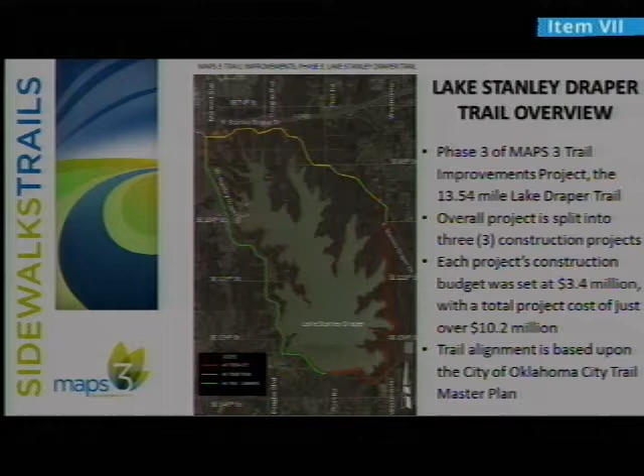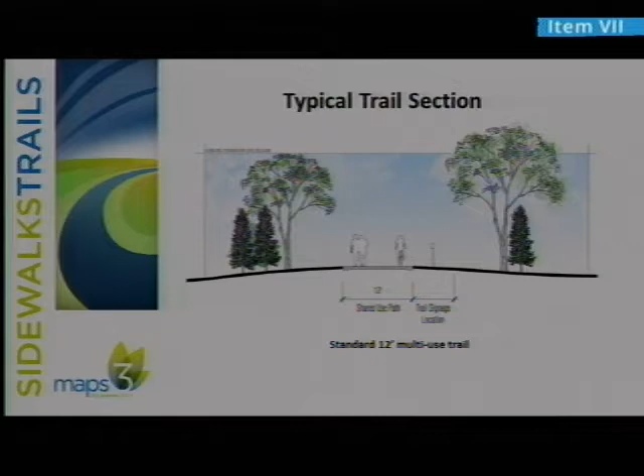The trail does follow the Oklahoma City Master Plan for alignment in most locations. There were a few adjustments made, suggested by the MAPS Trail Subcommittee, that were incorporated into this project. All of the trails follow the standard set for previous trail projects throughout the city - a 12-foot multi-use trail with trail signage throughout, which tells you exactly how far and what location you are on the trail system.

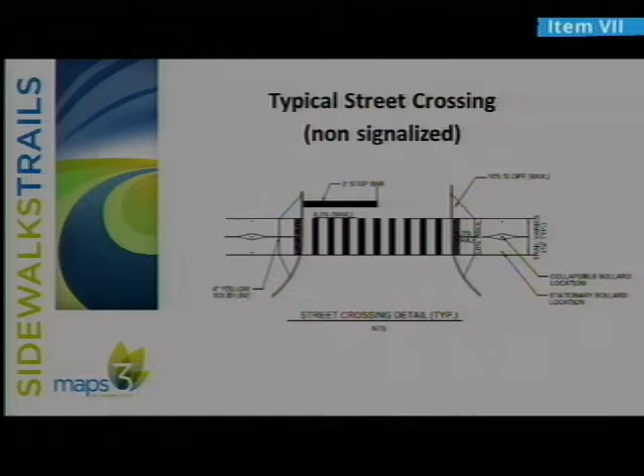This trail is more of a rural trail system. We do not have any signalized intersections, so we're utilizing the city standard developed with previous trails on non-signalized street crossings - very highly visible for pedestrian traffic as well as vehicular traffic. These will be concrete, consistent throughout the entire Draper Trail for all of the projects you'll see.

Our project is Project T003, basically along the western portion of the lake, probably the more developed area so far. Our project starts at Southeast 89th Street, where we will tie to Mr. Williams' project - that'll be up in just a moment. It basically follows West Stanley Draper Drive, about 25 feet off of the roadway.

If you've been out there, you'll know the roadway has a 45-mile-an-hour speed limit. We want to make sure the trail is off of that, in what we call the clear zone, for any errant drivers that have run off the road - they still have time to recover before they get to the trail. We want the trail visible from the roadway, yet still a safe distance away from any errant drivers.

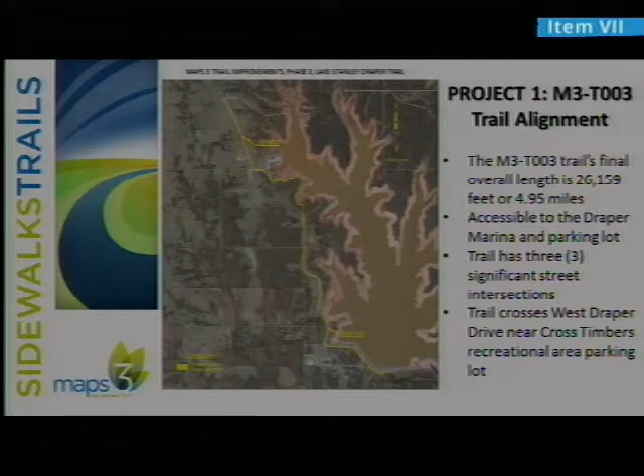Our project is a little bit over 5 miles, or just a little under 5 miles. It does have accessibility to the marina area and parking lot that could be utilized as a shared use for a trailhead location. It does have 3 significant crossings at 89th, 104th, and a little bit farther down along Water Plant Road. But it also has another access to the Cross Timbers trail parking area, recreational area that we could also use as another trailhead about midway along our trail alignment.

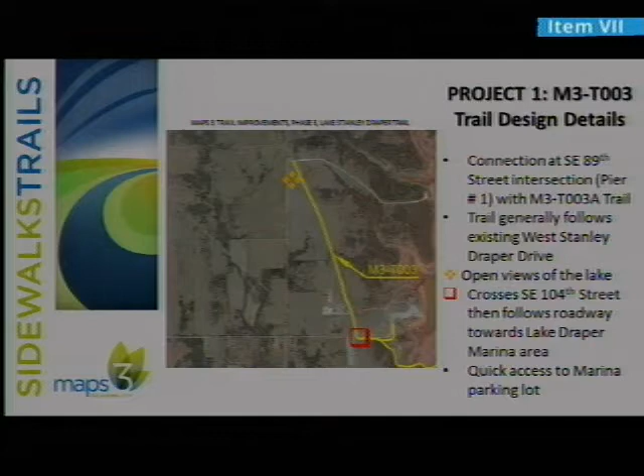As we say, we started basically at Southeast 89th Street. It's a very open area. It does go south and southeast adjacent to the roadway and attaches to the Lake Draper Marina area. Some of the views you will see along the trail, in particular our area, is a little more open than in some of the areas on the southeast side of the lake. But you can see here we do have some views of the lake as we start southwards towards the marina.

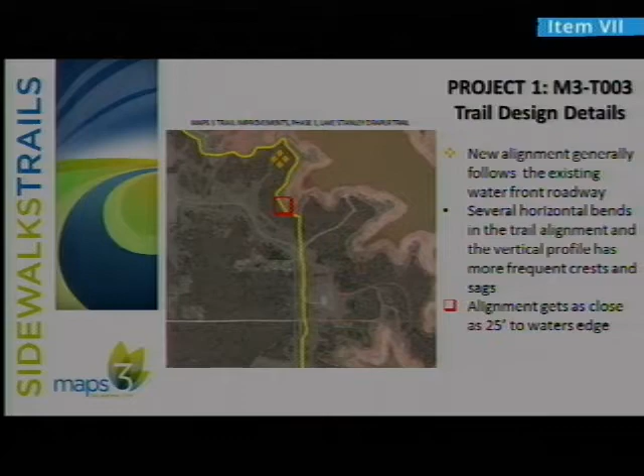One of the suggestions from the MAPS subcommittee was to get a little bit closer to the lake, in areas very similar to Lake Hefner's trails. We've done that. It did add some horizontal curves to the trail, so bike pedestrians may not be able to be speeding through this area. They will have to slow down, but we take into consideration that pedestrian traffic will also be jogging through this. So it does have some nice views and vistas of the lake.

As we continue a little bit farther south, the trail will eventually connect to the Baxter Remote Control Airfield. It does have a connection there. We do stay on the east side for a majority of the trail, on the east side of Lake Draper Drive, near the Cross Timbers

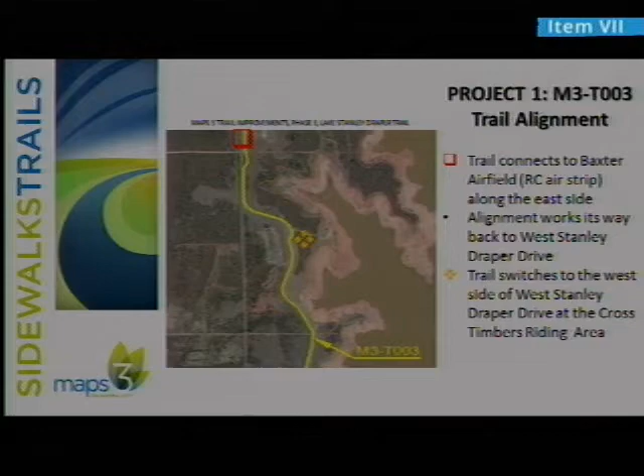riding area. We do switch back to the west side through this. It's a very high visible area, so pedestrian traffic can see oncoming vehicles, and vehicles can see oncoming pedestrian traffic. So the location of that crossing is in the far foreground of the roadway there. If you can envision, the trail will be between the utility marker poles and the trees in this location. So there's a very good visible view for all pedestrians using the trail as well as the drivers in that area.

We do have advanced signage for both the West Draper Trail as well as the West Draper Drive pedestrians. Lastly, our section terminates on the lower side of the dam, just to the east of the existing Draper Water Treatment Plant.

It does cross the Water Treatment Plant Road, which right now is under construction. Our project will be there first, so we are going to replace the drives that we go through with concrete drives that will handle construction traffic as well, but it'll also give trail users a very smooth and consistent surface for walking, riding, and biking.

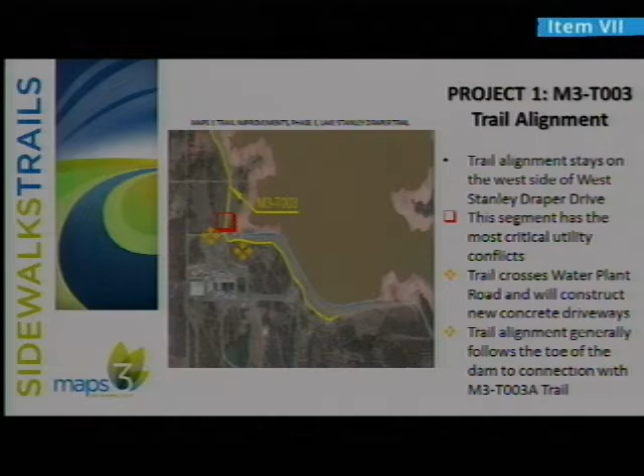Lastly, as we continue south and east below the dam, we wanted to make sure the trail had a visible view from the dam road itself. We want pedestrians, bicyclists mainly, that are utilizing the roadway to see where the trail is, see how friendly it is, see it's very open, with views and vistas. So we want to make sure our trail is visible from the roadway so we can get some of those bike users off the roadway and that conflict with vehicular traffic, and get them on our trail system here.

As we mentioned earlier, our budget is just a little more than $3.4 million. The initial concept was just above $3 million. As we've made adjustments with the suggestions of the oversight committees, that cost escalated slightly. We've gotten that back down to below budget again. Today, our estimate is almost $3.4 million, and we do still have a small contingency in there for any anomalies that may occur in the bidding process in the next few weeks. So we are under budget.

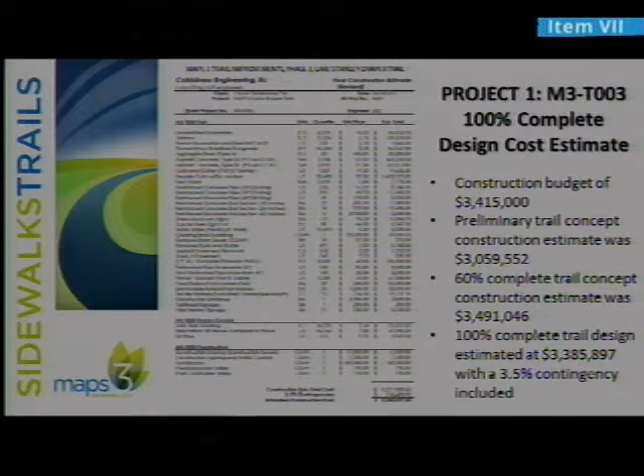Approval today by the council. Our schedule here is we're ready to advertise, go to bid this project in late November, come back to the council for award, and be ready to issue a notice to proceed for construction in January. We anticipate construction is going to be 6 to 7 months, weather depending, and construction will be complete in August.

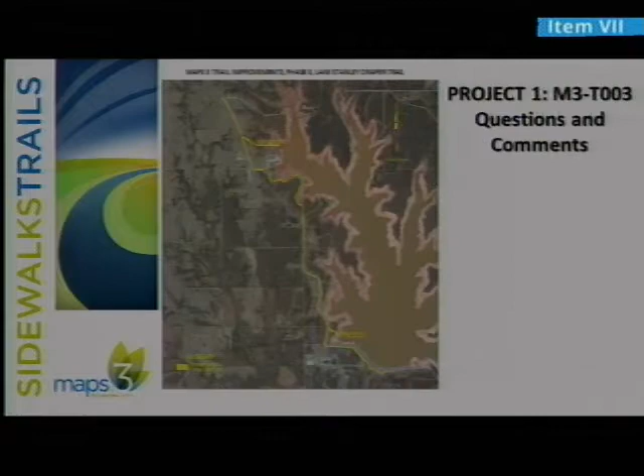Next up is Robbie Williams from Triad to talk about another section of the Draper Trails. There's 3 sections. 2 of the 3 will be going out to bid today.

Good morning. Robbie Williams. We have the Lake Draper Trail Phase 3, and we will connect with Mr. Cabinas's trail at Southeast 89th. We'll go north. Our trail is on the north side of the lake and the west side. We're more in the rural area. There's no connectivity to any existing facilities.

So I'll run through this. I'm not going to go through a lot of what Brett said. Our project, we are 25 feet off the road for the clear zone and the safety. We have several drainage structures that we have to extend, which we will do. But we will bring the trail in closer to the road and install guardrail. That way we're not spending more money to extend a structure. So with that, we'll get going.

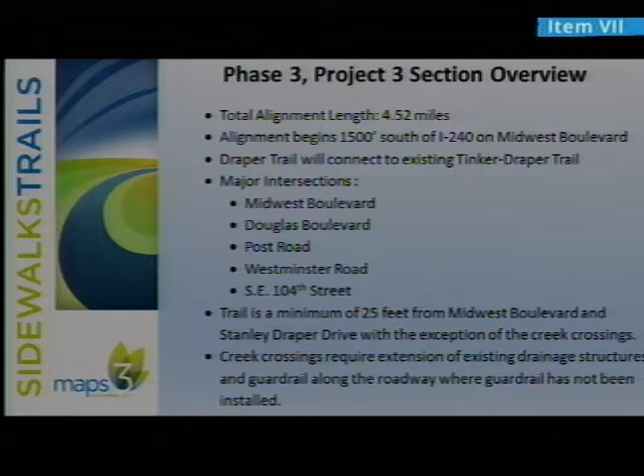Our trail is about 4.5 miles long. We have major intersections at Midwest Boulevard, Douglas, Post, Westminster, and 104th Street. There's not a lot of traffic, but we will put the crossings. I mentioned the 25 feet clear zone and the creek crossings. Our construction budget is the same as everybody else, about 3.4, and right now we're just under $3.3 million.

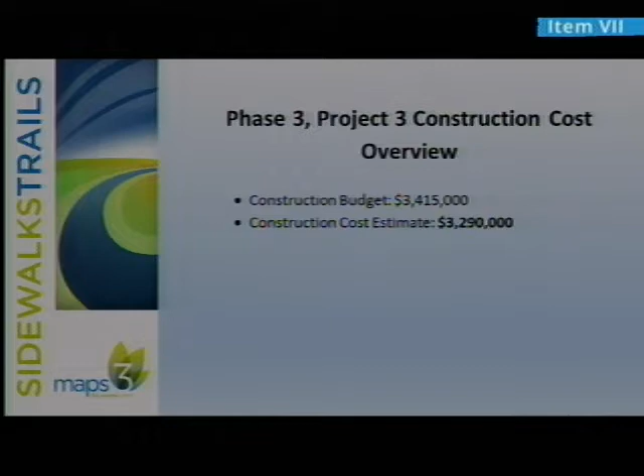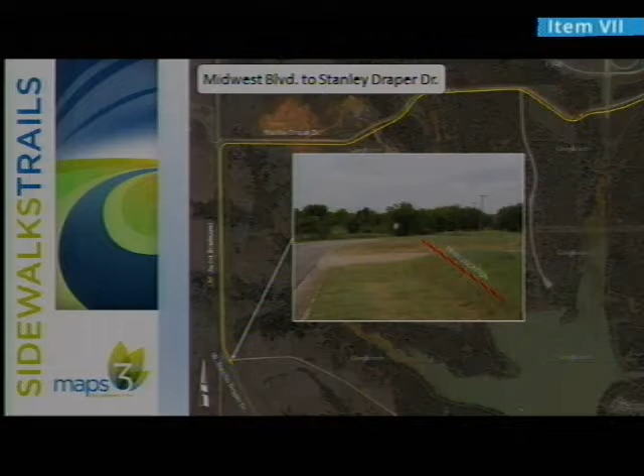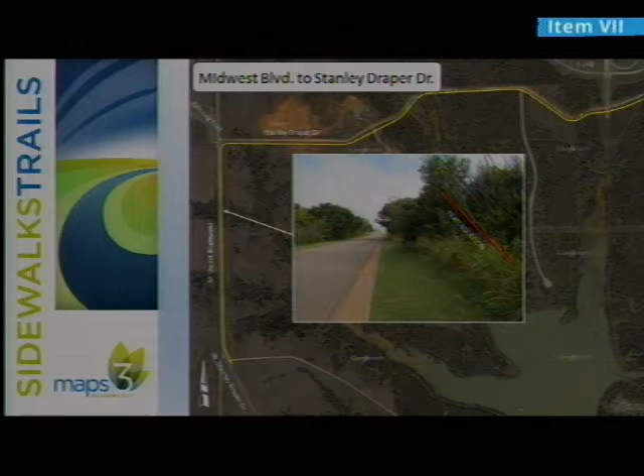We'll just kind of go through the trail alignment with the picture. Again, here's where we connect. The red line will be generally where the trail is located. And as we go along, we do have some areas that we will clear trees and vegetation. One of our project goals is to minimize the tree removal around the lake. Again, here's a drainage structure that we will be extending as we go north.

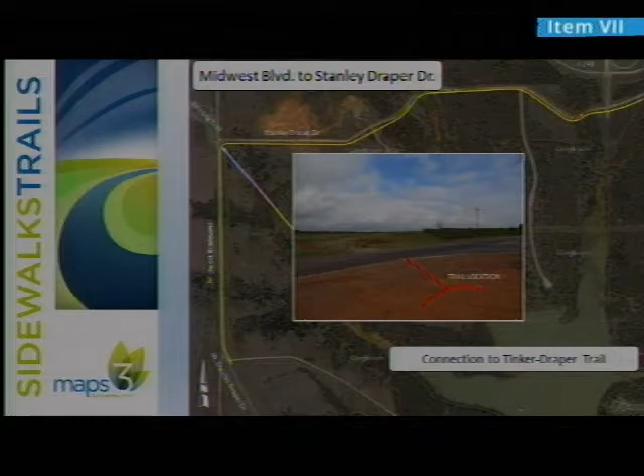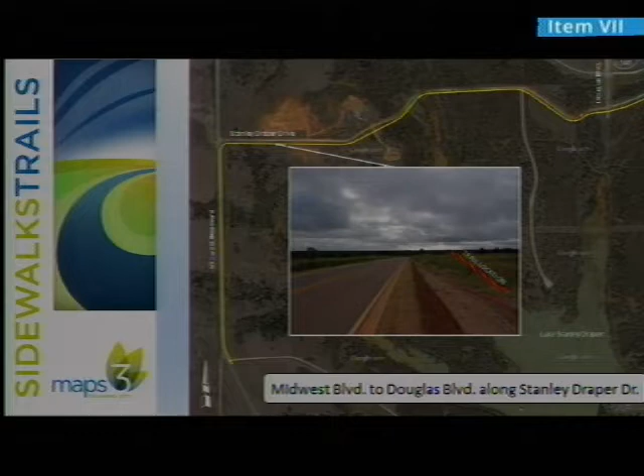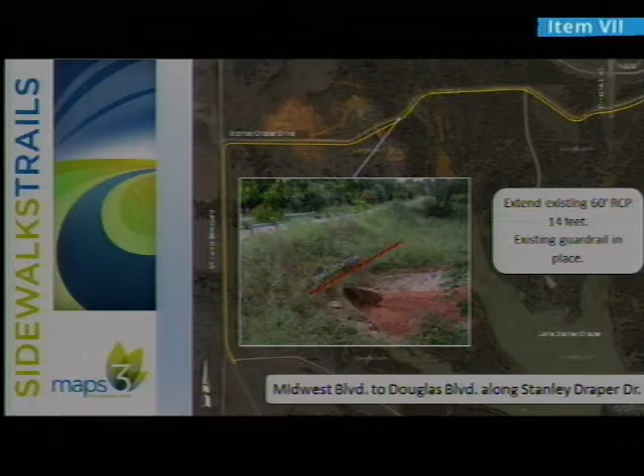At the intersection of Stanley Draper Drive and Midwest Boulevard is our connection to the Tinker Draper Trail. About a year ago, the Water Trust reconstructed Stanley Draper Drive, so our trail will be following basically the roadway. Again, just another small culvert we will be extending. Here's where we start getting in the wooded area. Again, another structure. These all start to look the same here in a second.

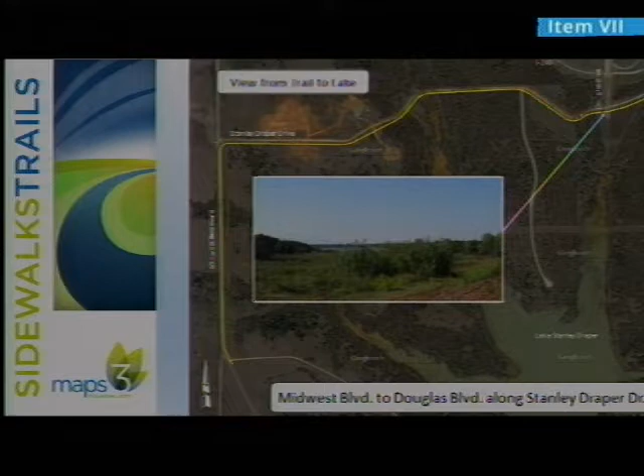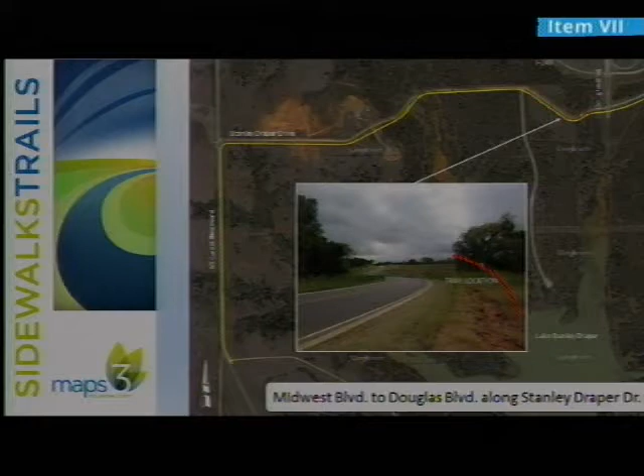Our trail does have a few locations where you can see the lake, and this is an example of one of those locations. Again, we're following Stanley Draper Drive. The new Stanley Draper Drive that was constructed to the existing Stanley Draper Drive on the east side is actually a 25-mile-an-hour posted roadway. Again, here's another culvert that we will extend. And now we get more in the rural part.

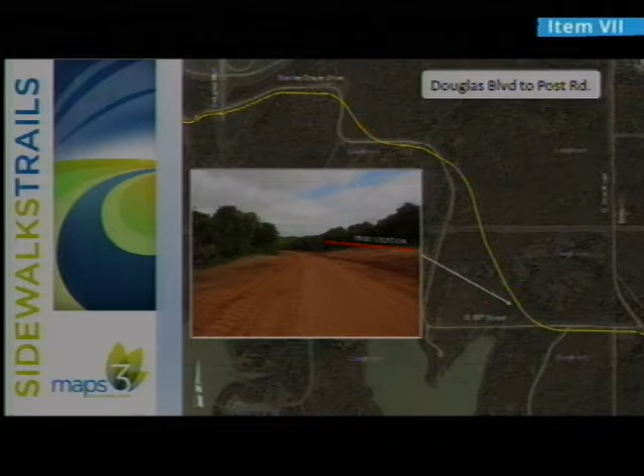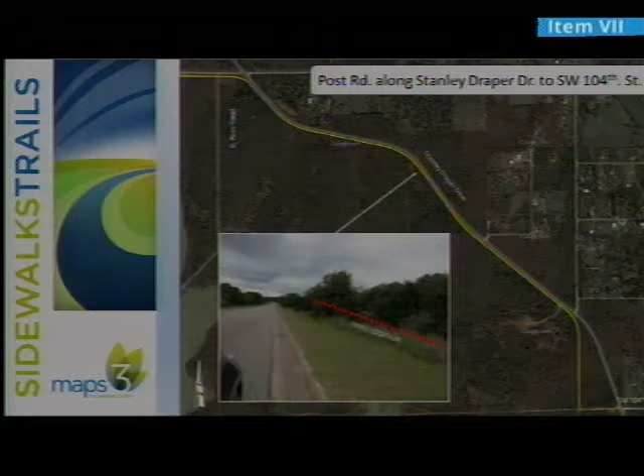This was when the road was under construction. Our trail will be up on the hill, and we will be removing a few trees. Here's a good example of where we will have to clear trees, probably about 50 feet wide as we go along the road. And then we do veer off of Stanley Draper Drive, and there's an existing dirt road where we will locate the trail. This is the connection to Project 2, which I believe is coming in about a month.

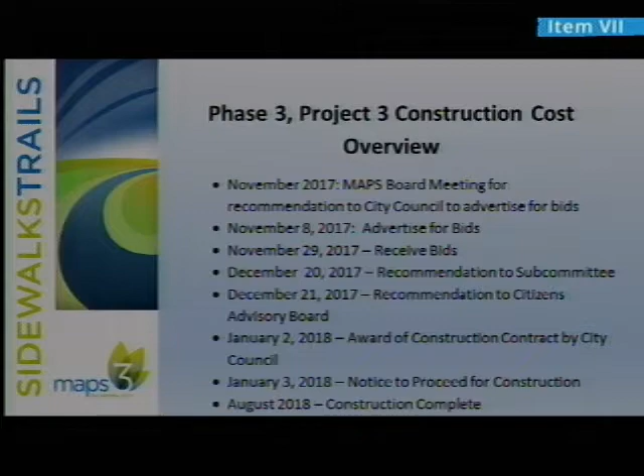So again, our schedule is the same as the Cabinets Trail. We hope to bring it back to the City Council on January 3rd or January 2nd so we can start construction and be completed in August. So with that, if anybody has any questions, I'll be glad to answer them.

So do these two presentations add up to the entire MAPS 3 trail out here? Is that 9.5 miles? No, there's 3 segments. These are 2 of the 3 segments going out to bid today. A third segment will be coming forth in the next few weeks. So what's the total distance of the trail? About 13.5 miles. And ultimately, it will tie into our larger system. Yes. So how many miles is it from the closest point today to where this trail begins? If you're talking Grand Boulevard near Trosper Park. Well, David, can you talk about the connection?

Robbie, you're connecting up at the northeast or northwest corner, right? Yeah, Tinker Draper Trail, he's connecting there. I'm not familiar enough with that trail, Mayor, of how that connects with Trosper and all that, so I can't answer that right now. But long-term, we have plans to connect this trail with the other aspects of our trail system. I know that's the goal. I'm not saying it's funded, I'm just saying there is a plan to. Well, I think that's planning's goal, to create a trail system that connects like that.

Yes, Todd? So phase 2, we expect to send it out to bid in a month, is that right? Approximately a month? This is phase 1 and 3, correct? Right. Phase 2 had a couple things that we need to get fixed, and we need to stagger those bids anyway so we can strategize with how they get bid. So yeah, it's scheduled to go to the subcommittee next week and then to the advisory board.

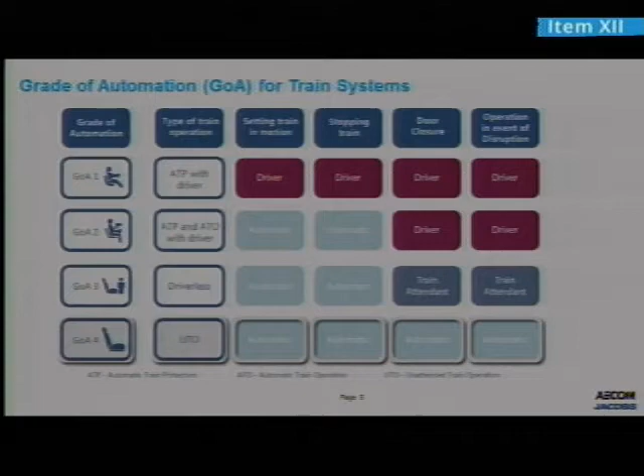While there's a lot of buzz lately about autonomous vehicles, autonomous operation of rail systems actually has a fairly long history. Beginning in 1967, there was the first automatic train operation, in the London Underground. The vehicle operates with no driver in the cab, so the operator on board is really more of an attendant.

Next up, in 1983 in France, you had unattended train operation. That system has been in operation since the early 80s, and there are no recorded fatalities, so it has a pretty high safety standard.

Moving on to grade of automation 2, these are trains that run autonomously from station to station, and the driver remains on board, responsible for opening and closing doors. One example is the BART system in the Bay Area, California, which has been operating like that since 1972. So there is an operator in the cab, but that person isn't actually controlling the stopping and starting of the train.

Grade of automation 3 has none in the United States, but there are some, notably in London, Barcelona, and elsewhere in the world, and those systems have been in operation since 1987.

Finally, grade of automation 4, this is the one where the vehicle is completely autonomous. There are 15 operating in the United States. The example we're showing here is the Miami Metro Mover, but usually these are vehicles on a completely separated guideway, so they're not running in mixed traffic and not interacting with pedestrians or cyclists.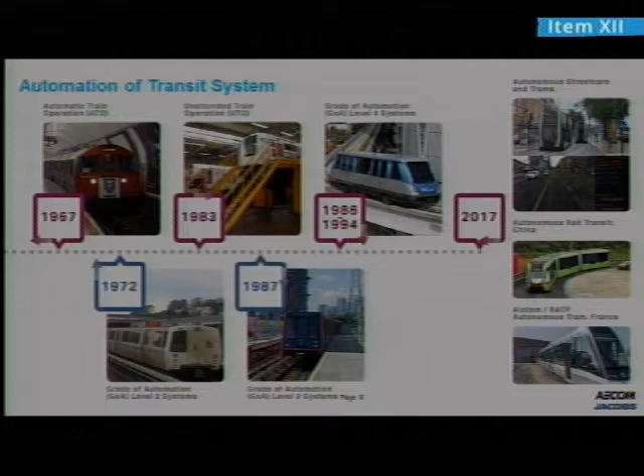Moving on to the definitions of connected and automated vehicles, for vehicles, not rail. The US DOT defines autonomous vehicles as a vehicle where some part of the vehicle function is not controlled by the driver, and those vehicles can be automated and/or connected.

For connected vehicles, there are various levels of connectivity. The first level is vehicle-to-vehicle communication, where the vehicle can communicate with other vehicles on the road. Next is vehicle-to-infrastructure, where the vehicle can communicate with, for example, signals or light posts. Finally, vehicle-to-everything, where the vehicle can communicate with other vehicles, infrastructure, and other users of the right-of-way.

So, for example, if I'm a pedestrian or cyclist, I would get a notification that an autonomous streetcar is coming up and that I should slow down or stop, and vice versa—the vehicle might know that there's another user of the right-of-way there.

In terms of the regulatory context, it's moving quickly in parallel with developments in the technology. There are a couple of federal regulations and guidance documents applicable for our study here. The first is the vehicle-to-vehicle communication guidelines from the federal government, which proposes that 100% of new light-duty vehicles be equipped with vehicle-to-vehicle communication by 2023, and notably that communication systems will speak the same language. For example, a Toyota and a Ford would be able to communicate with each other and other users of the right-of-way. Next is the federal regulatory guidance.

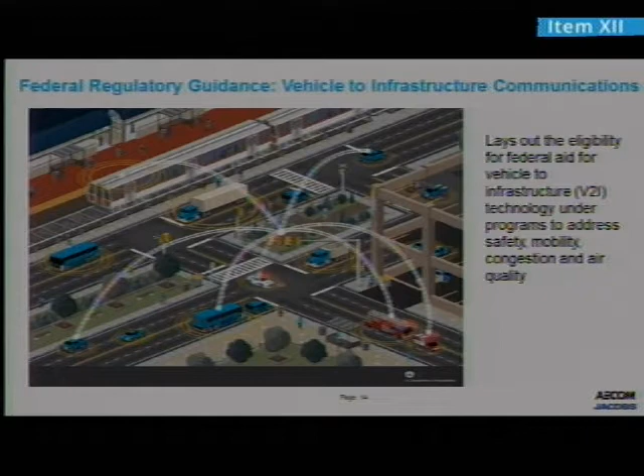Next is the vehicle-to-infrastructure communication guidelines, also from the federal government. This one essentially defines what the federal government includes as a vehicle-to-infrastructure project, and it's notable because we would have to comply with this if we were able to apply for any federal funding for a project.

And finally, this is most recent. This is a bill that was passed in the House, not yet considered by the Senate. It was unanimously passed, which I think is fairly notable given the current state of affairs in D.C. The acronym Self-Drive Act is Safely Ensuring Lives, Future Deployment, and Research in Vehicle Evolution. Essentially, this lays out the definition of what would be considered connected and autonomous vehicles, and also sets standards for operators that want to move forward with those types of projects.

And then finally, looking to the state level, you can see that across the country, there are various states that have enacted legislation. Since 2012, 41 states have considered, and 21 plus D.C. have passed autonomous vehicle legislation.

Here in Oklahoma, Senate Bill 202 is pending. The last action taken on it was February of 2012. Essentially what that bill does is define autonomous vehicles, and it instructs the Department of Public Safety to adopt regulations for operation of autonomous vehicles in the state.

But what we learned from the review of state legislation was that it's kind of a mixed bag in terms of what states are doing. The fact that there are no enacted regulations does not necessarily preclude a state or local municipality from moving forward with a pilot project. Some of the projects that have received federal funding for autonomous vehicle pilots are in states where there is no enacted regulation.

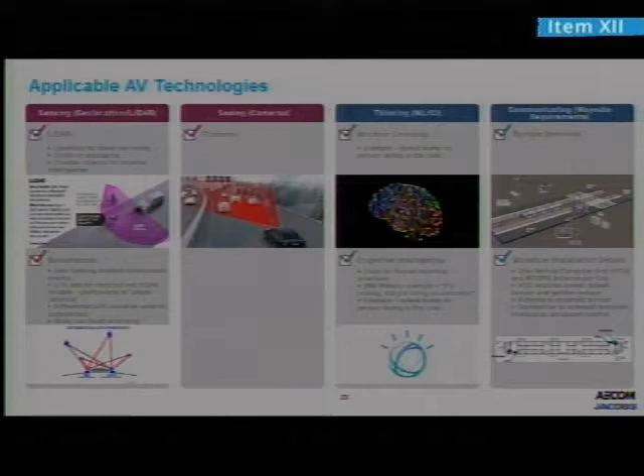And then finally, based on our review of the legislation, industry interviews, and technology assessment, we defined what the system requirements would be for an automated streetcar operation. I'll go over the first 3 of these and then turn it back to Mark. Broadly speaking, we can categorize them into sensing, seeing, thinking, and wayside requirements.

On the sensing side, there are 2 technologies that enable the vehicle to know where it is in space and then also detect what sorts of other users of the right-of-way there are. LiDAR is light radar, and essentially the vehicle puts out a light radar and is able to detect if there are other users in the right-of-way. Geolocation enables the vehicle to know where it is in space and in time.

There have been a lot of advancements in high-definition cameras, and so these seeing technologies would enable the vehicle to, for example, tell the difference between another vehicle or a pedestrian or a cyclist in the right-of-way.

And then finally, moving on to, I think, more in the future and more cutting edge, is the thinking technologies. So these are artificial intelligence. These types of technologies are being used in passenger vehicles right now, but they would be able to, for example, know the weather, so that when you come into the vehicle it can say, good morning, Mayor Cornett.

Did you remember to bring your umbrella today? We know you often forget it.

So really moving into advanced stages of the vehicle understanding its environment. The final aspect for streetcar operations we wanted to touch upon in terms of system requirements was the wayside requirements. What would we need to do on the infrastructure side to enable communication with the vehicle? I'll turn it back to Mark to go over some of those.

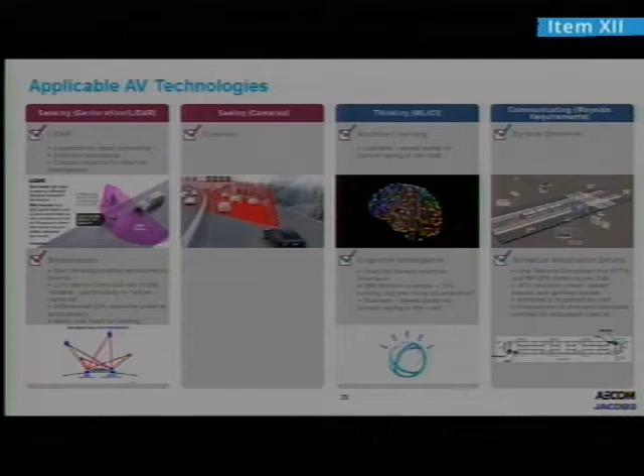Some of the wayside infrastructure would be rather modest. Essentially a supplemental computer on board the vehicle with an antenna that would communicate to components integrated with the traffic signal controllers. A lot of this technology is in development and in operation with some bus rapid transit projects across the country, looking at traffic signal priority systems.

As far as the vehicle requirements, we had Bob Heifel help us with a study. He's from Jacobs and has been overseeing the procurement of the streetcar vehicles.

In addition to that autonomous computer that would have to be integrated into the vehicle, we would have to connect all the functions that the operators serve. The next three slides are just to give you an idea of all those functions and complexities that would have to be overcome.

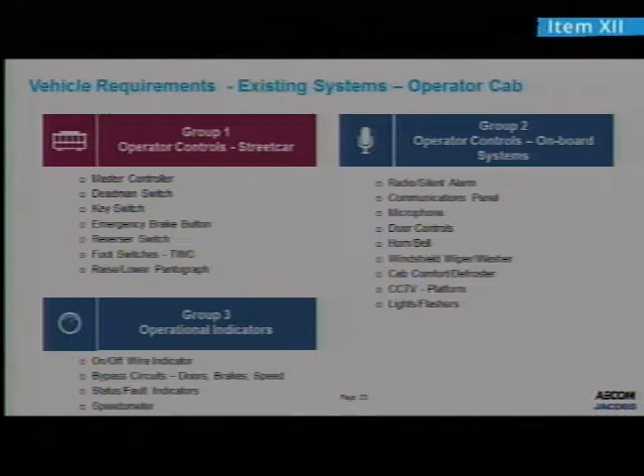So really, why are we looking at this? Why an autonomous streetcar? We think there would be a lot of real benefits to such an operation. First off would be safety and reliability, with sensing technology understanding the envelope of the streetcar and having a faster reaction time to react to safety conditions.

A good example would be with streetcars: often if there's a parked car fouling the trackway, or it looks like it's encroaching onto the trackway, an operator will take care to make sure there isn't a conflict, which could slow down or even stop the train. Whereas sensing technology would understand right off if there's a fouling of that envelope for the streetcar, so there would be certain efficiencies there that result in reliability.

One of the biggest benefits is that with autonomous level 3 and 4, as Veronica described, with level 3 you still have a person on board. Initially you could convert that operator driving the streetcar into a more traditional conductor, or what we were terming ambassadors in our report. That person would be inside the cab with the customers, much more customer facing, and could serve several needs as far as customer service, ticket vending or fare inspection and other functions where some operational cost savings could really be realized.

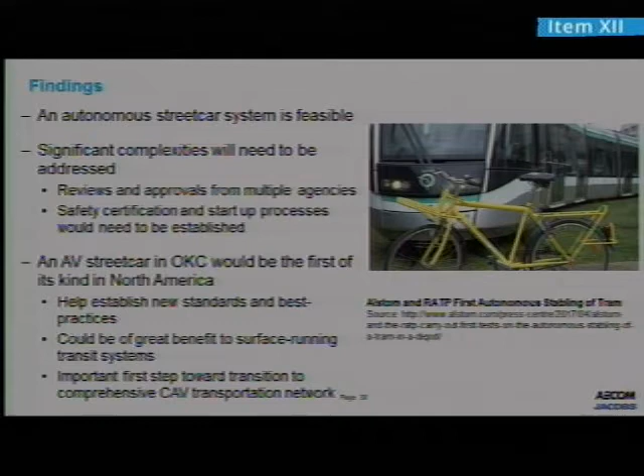Mostly the standards of how this would be rolled out and developed, and how the operations would be tested and incrementally approved by the reviewing jurisdictions, including USDOT, would be an important part of this step of rolling out an autonomous operation. Because it's the first of its kind in the industry, there would be that benefit to the industry as well.

So our recommendation is to undergo a pilot project and to reach out to the USDOT if so desired, but because there would be that benefit to the industry, we feel there would be interest on USDOT's part to help develop this as well.

This would be, more or less, a public-private partnership. There are many in the private sector, including the autonomous vehicle technology people in the private operating sectors, but also the engineering and architectural world, that would be interested in helping develop this. Because there would be that return on investment, we recommend that we reach out to the USDOT and move forward with that.

So the pilot project itself, the scope of this would be to fully understand the costs and the benefits, the logistics of the wayside and interfaces with the streetcar, and understand all the testing and safety certification for each step of automation as it is incrementally achieved.

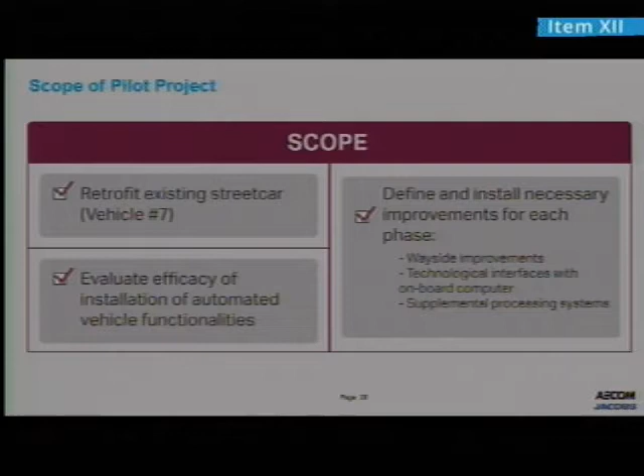We'd also work to understand and implement what that retrofit of the wayside infrastructure would require. Another unique opportunity with your streetcar project is what we call the non-revenue track -- the track that goes from the mainline service at Oklahoma Boulevard down to the maintenance facility. This is a little more than a third of a mile down Hudson, and it would be an environment that is easily controllable and could serve as a perfect test track for the autonomous streetcar to roll up and down as those testing requirements are figured out.

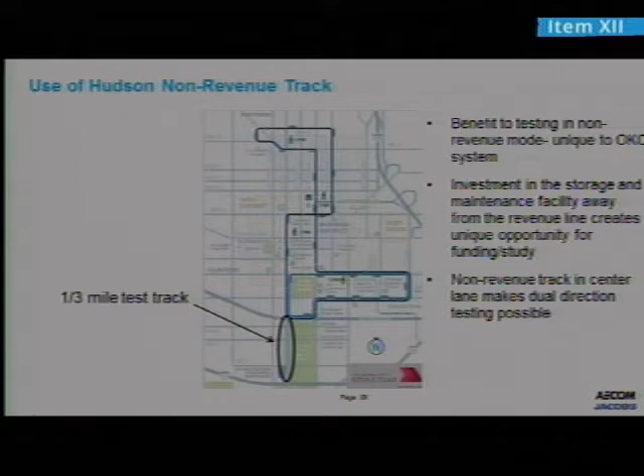With a pilot project, we would take an incremental approach, so with each phase we would have that level of autonomous operation, as Veronica described. We'd start with level 1, then go to level 2 where the driver is in the cab monitoring the situation, but we could eventually increase the autonomous operation to level 3, again all on that non-revenue track, going up and down that third of a mile. Then, as we achieve each step, we could expand that into the Bricktown loop, the one-mile loop that goes into Bricktown and back to the convention center.

Each of these phases in the pilot project would document the requirements of safety certification and testing that is required. We're already doing this for your initial streetcar job, but this would be something new, and the result of the pilot project would be a meaningful document for anyone else in the future undergoing a similar initiative.

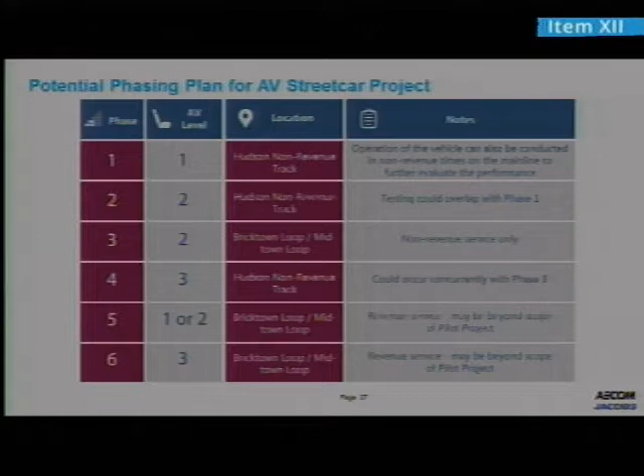We also think there should be a public outreach component to this, mostly just to educate the public and make them aware of what is going on, but also to understand any concerns.

We also think there might be an opportunity to get other participants involved in the initiative. Since the streetcar itself would be this rolling data collection and processing unit, maybe there are other applications you can leverage from this, such as monitoring on-street parking and where vacancies are.

We also, as far as the public-private partnership, we think this is an opportunity for that. We've put together an outline of a funding program we think would be about a 3-year effort, which would be reasonable.

We think the grant application from USDOT should be on the order of about $3 million, and then there would be a certain amount of contribution made by other participating entities, mostly in the form of time donated towards the effort. We think there should be outreach to the universities to get them involved, but also from the private side with the operators, the vehicle supplier, and the autonomous technology suppliers as well.

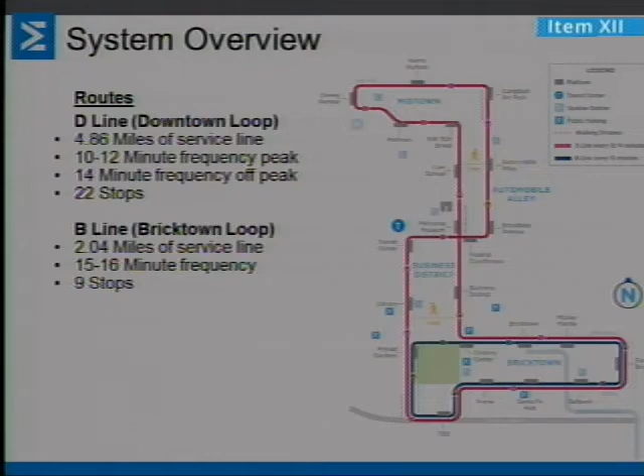Looking at our service span, the D line will operate Monday through Thursday, 6 a.m. to 12 a.m., Friday 6 a.m. to 2 a.m., and Saturday 7 a.m. to 2 a.m. The B line will have the same service span as the D line, but as we start the system, we'll have regular service on Friday and Saturday, and we'll run the B line when we have events and conventions occurring. The only Sunday service we'll provide will be when we have events and conventions, and that's the extent of the Sunday service we have planned when we launch the system.

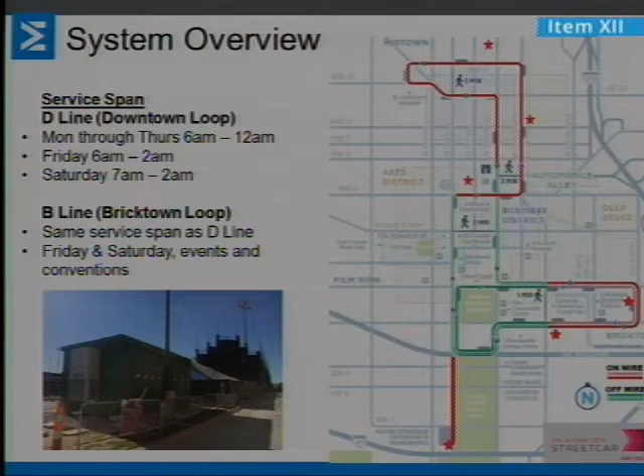Okay, so looking at operations preparedness. As you can imagine, 14 months away from streetcar operations, Embark staff, Herzog our contractor, and their staff are very busy getting ready for all the things that go into preparing the Oklahoma City streetcar for operations.

We're looking at about a 14-month timeline with several major objectives to accomplish over that period. Through the presentation I'll go into each one in more detail, but first up is moving into the storage and maintenance facility and equipping that facility as it is completed.

So, the storage and maintenance facility. We're looking to move in January of 2018 following the completion of the building in December. I wanted to give council a sense of really what is going to occur in this building.

We talk a lot about it being the storage and maintenance facility for the vehicles, and this is true. This is where they'll be stored, where we're going to work on them and maintain them, but this is really going to be the operations center for all of Oklahoma City Streetcar.

This is where all of the staff will report for duty. We have training facilities located within this building so that we can train people that need access to our right-of-way, train employees, and this is the location of the control center.

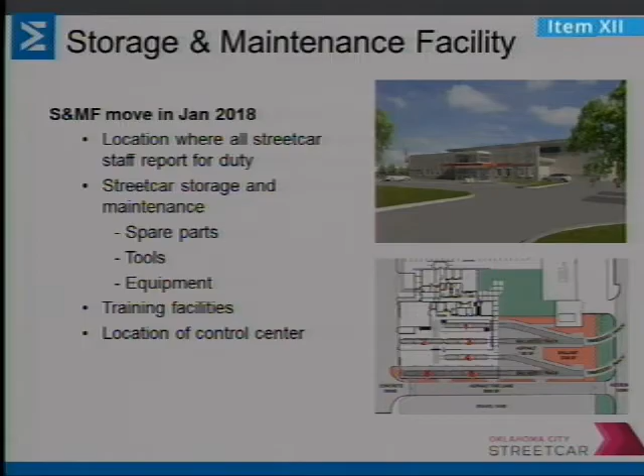As far as major tasks go, as we begin moving in January, we'll not only be setting up the administrative offices and making sure all of our technology is working, but we'll begin ordering parts and special equipment and inventorying those appropriately. A few pictures for you here of the storage and maintenance facility.

So vehicle delivery and testing. As Mr. Couch had mentioned, we do have some flexibility in delivery, which is a good thing for our operation. Once the storage and maintenance facility is complete and we have begun standing up that building, then we'll be in a position where we can receive delivery of the vehicles and have a place to store them.

So again, we're looking at taking delivery of vehicles probably somewhere in the January to March timeframe.

Just to give you an idea of the type of inspections and testing that will be done: first, before the vehicle even leaves the factory, it will go through a first article inspection. The factory production manager and the MAPS 3 consultant, who has been on site since the vehicles began production, will go through a checklist of different items, making sure the vehicles were built according to specifications. Once they arrive in Oklahoma City, Brookville representatives will be on site.

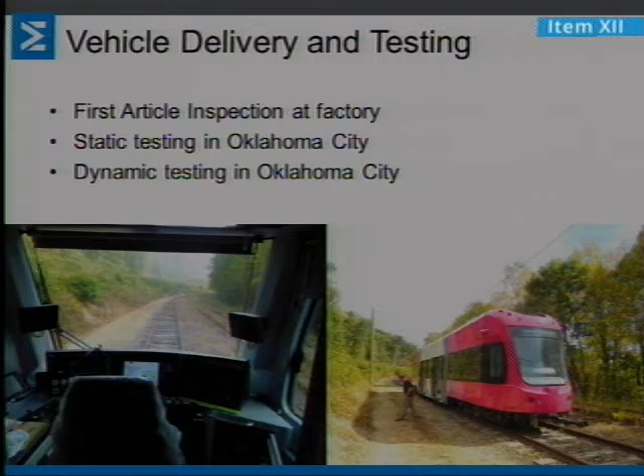We mentioned inspection and testing. Several of us from Embark, the MAPS 3 office, our state safety oversight office, and Herzog, our contractor, took a recent trip to Brookville, Pennsylvania to inspect the vehicles on the production line. We timed it so all of the first 6 vehicles were in production, from vehicle number 1, which is pretty much complete, down to vehicle number 6, which is just getting framed, and everything in between. It was very enlightening and informative.

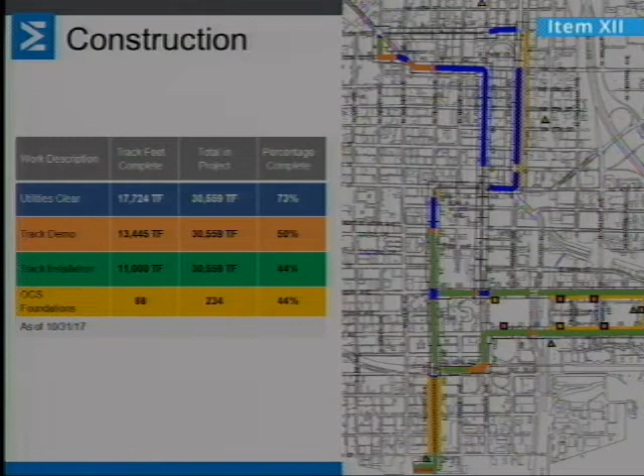I won't spend a lot of time talking about construction. That's managed by the MAPS 3 office, but it's a critical part of being ready for operations, monitoring the construction schedule and participating in the construction meetings. This image gives you an idea of where we're at on some main pieces of construction. The table on the left shows about 73% of utilities clear, track demo at 50%, track installation at 44%, and OCS foundations, the foundations for the overhead catenary poles, at about 44%. It's color-coded so you can see what parts are occurring on the route.

Talking briefly about staffing, for a successful streetcar operation we have to have adequate, well-trained staff in place. As far as Embark staff goes, we've had a streetcar operations manager on staff for a little over a year now. We've had a lot of support from our safety officer, public information office, and administrative support staff helping the project move along. As we get closer to revenue service, we plan on adding a customer service representative to extend our call hours and address anticipated additional volume at our call center.

I mention that because one of the things we think is very important from a customer service perspective is that for customers using the Oklahoma City streetcar, it shouldn't matter whether it's Embark or Herzog, it's all Oklahoma City streetcar. When customers have questions about the service, they'll call the Embark call center. The uniforms, for example, will even be approved by Embark, with the Oklahoma City streetcar logo as well as the Embark logo. So although we have two different groups responsible for operations, the idea is to make it seamless and unified for the customer.

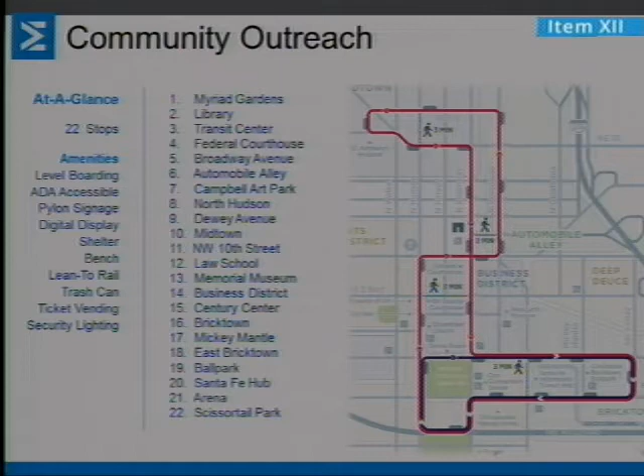As you'll recall, we had a lot of community involvement with our branding, and we used a similar model in community outreach, working with different stakeholders to name the streetcar stops. If you haven't seen the names, they're on the slide here - there are 22 different stops ranging from the Myriad Gardens all the way down to the Scissortail Park stop. We purposefully named these to be descriptive of the area the stop is located in, but not so specific that we couldn't garner sponsorships in the future.

Also looking at community outreach, social media is very important in getting our message out to our community. We try to post material at least once a week as we have different events occurring, and that frequency picks up. Currently we have a couple thousand followers on Twitter, over 400 on Instagram, and 588 on Facebook, and we expect to see that grow much faster as we get closer to operations.

One of the other things we've done with community outreach is we've reached out to the ADA community. As you'll recall, prior to construction we went out and mocked up and painted a streetcar stop platform along the route.

That helped us as the operator get a feel for where the shelter would be laid out and where we might want to put the ticket vending machine, but it also helped as an education piece. This is the stop we mocked up at 8th and Broadway, and we invited the Mayor's Committee on Disability Concerns to come join us at that platform so we could educate that group and receive their feedback.

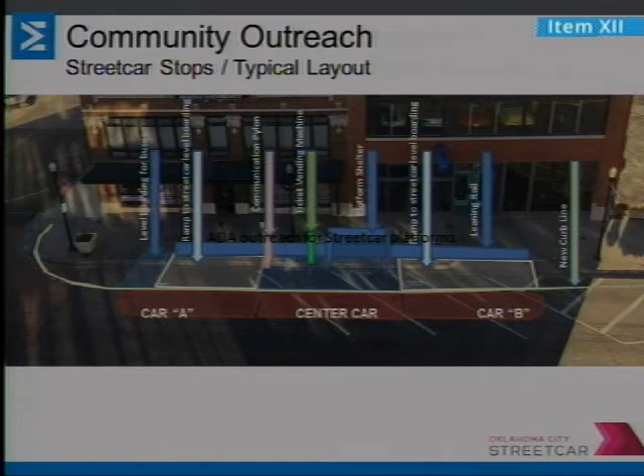We had about 8 to 12 folks from that committee show up and join us, and we will conclude that education piece with a similar tour of the first platform as it's completed, which will most likely be the ballpark stop platform. The idea there is to get that committee's input on the best way to communicate how to use the streetcar to the ADA community.

One of the other things we've been working on recently in terms of community outreach is our renderings. I have 3 renderings I wanted to share with you this morning - you've probably seen at least 2 of them. But the idea with the renderings isn't necessarily just to show what a streetcar stop looks like; it's really to help our community understand how the streetcar system is going to work.

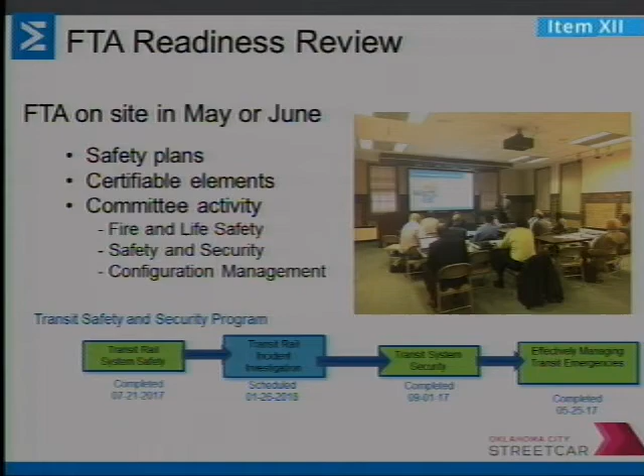Okay, so with that, that's an overview of what we have been working on, kind of behind the scenes, getting ready for operations, and we expect there'll be more to add as we get closer. I'll be glad to take any questions.

All right, questions for Jason? A couple of questions, sir. I have a bike, and I want to ride on the bus or on the streetcar. Where does the bike physically go, where is it located? Yeah, so in the mid-section of the car, there's actually a location where there's no seating and a bike rack.

And then second, you talked about stop layouts and planning for that. It can get awfully cold and wet and windy in January. What are we doing to protect people from the elements with the stops? Well, there is a shelter at each one of the stop platforms, and you can see it here with the individuals setting under the shelter. The shelters conform to our current standard, which is 3 sides. Also keep in mind the frequency on the streetcar, being 10 to 12 minutes during peak, 14 off peak, so hopefully the wait won't be too long.